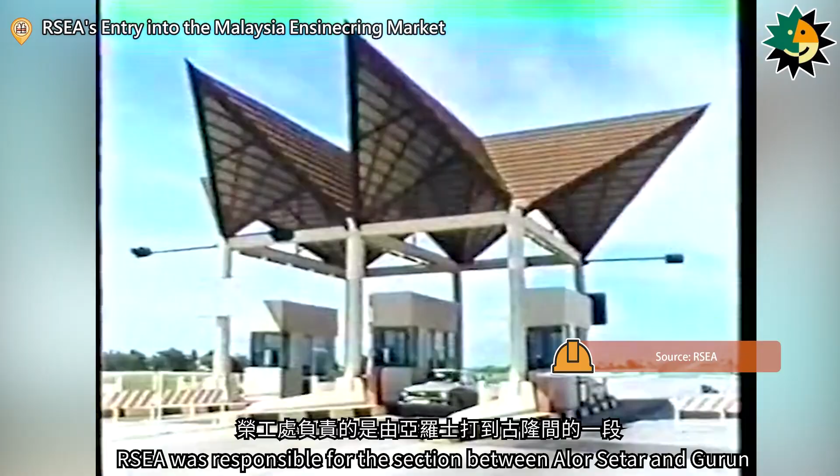The first project undertaken by Retired Servicemen Engineering Agency in Malaysia was the Gurun Expressway project, a north-south highway spanning a total length of 928 kilometers. Retired Servicemen Engineering Agency was responsible for the section between Alor Setar and Gurun. As the route had to traverse swampy terrain, construction proved to be extremely challenging.

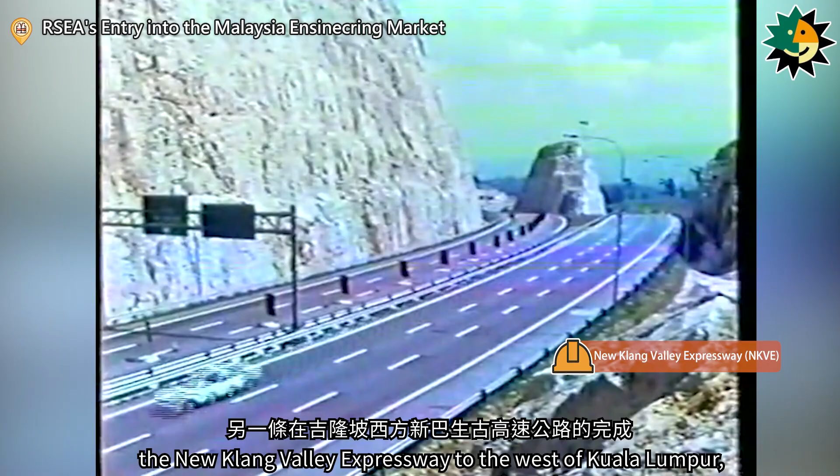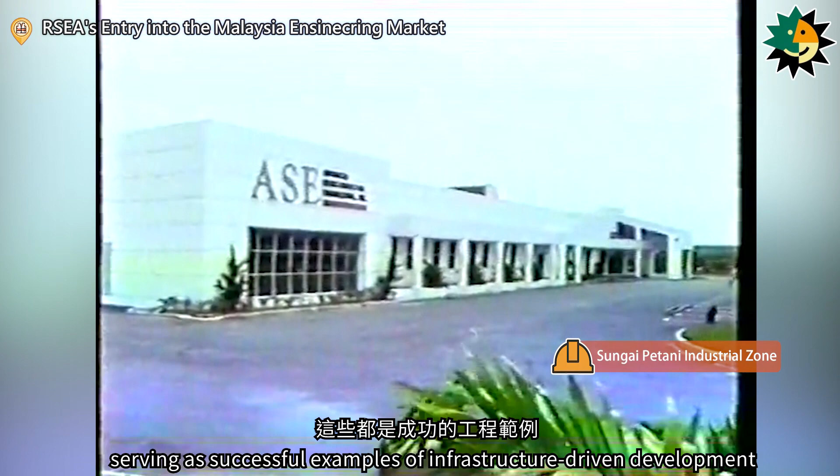The completion of another project, the new Klang Valley Expressway to the west of Kuala Lumpur, opened up a new economic backbone for the region, leading to the development of the free trade zone in Ipoh and the Sungai Petani Industrial Zone in Kedah. These zones attracted numerous domestic manufacturers to invest and establish factories, serving as successful examples of infrastructure-driven development.

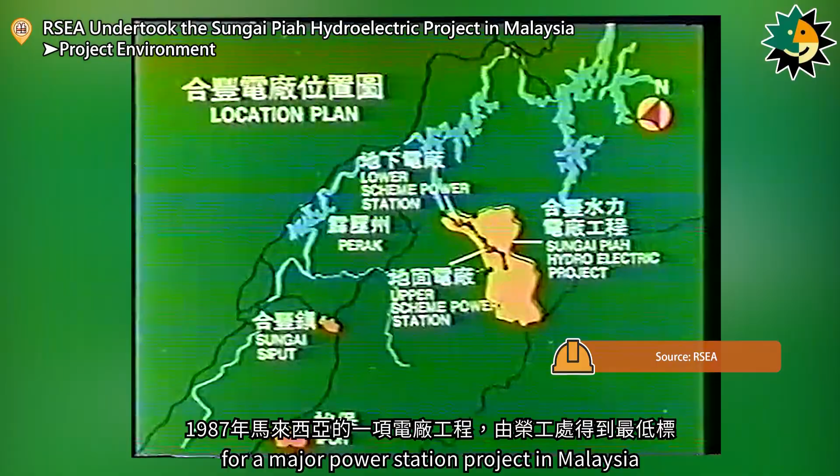In 1987, Retired Servicemen Engineering Agency won the lowest bid for a major power station project in Malaysia. The Sungai Piah hydroelectric project, located in the mountainous region approximately 60 kilometers northeast of Ipoh in Perak, Malaysia, was a massive and formidable undertaking. The project site was located in an undeveloped rainforest at an elevation of 800 meters.

To promote economic development in Perak State, the Malaysian government specifically chose the Piah River Basin for the construction of the power station. The planned catchment area covered 364 square kilometers. The entire project was primarily divided into two construction sections, the upstream and downstream segments. The upstream section included an upper power station, a low-pressure tunnel, steel liner tunnel, and access tunnels totaling 8,000 meters in length, along with 2 vertical shafts and 3 intake structures.

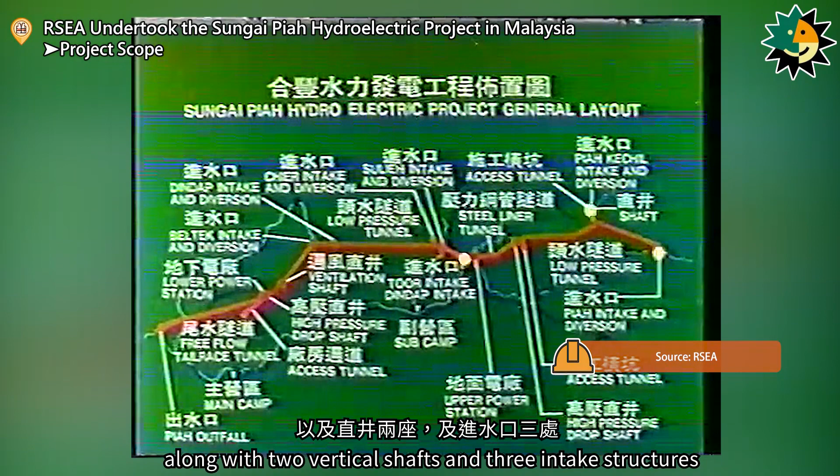The downstream section included a low-pressure tunnel, plant access tunnels, a lower power station, steel liner tunnels beneath the plant, and a free-flow tail-race tunnel, totaling 16,000 meters in length. It also featured 4 intake structures and 6 vertical shafts. Other construction work included more than 1.6 million cubic meters of surface excavation, over 300,000 cubic meters of backfilling, 66 kilometers of road improvement, 11 kilometers of new road construction, and 5 bridges.

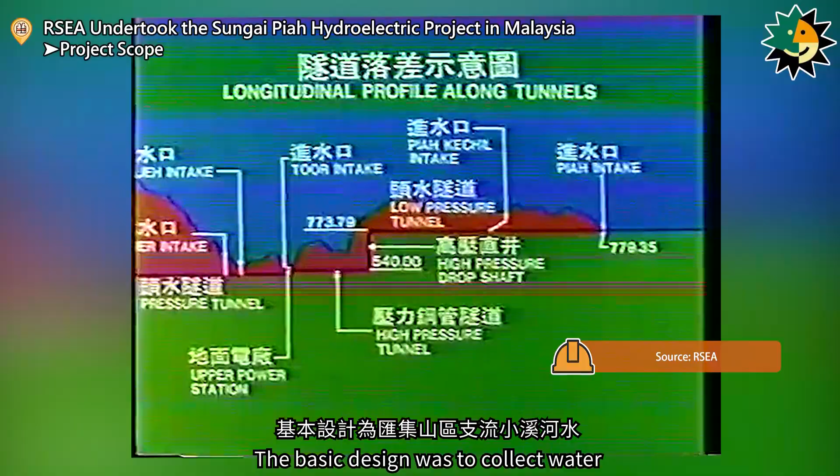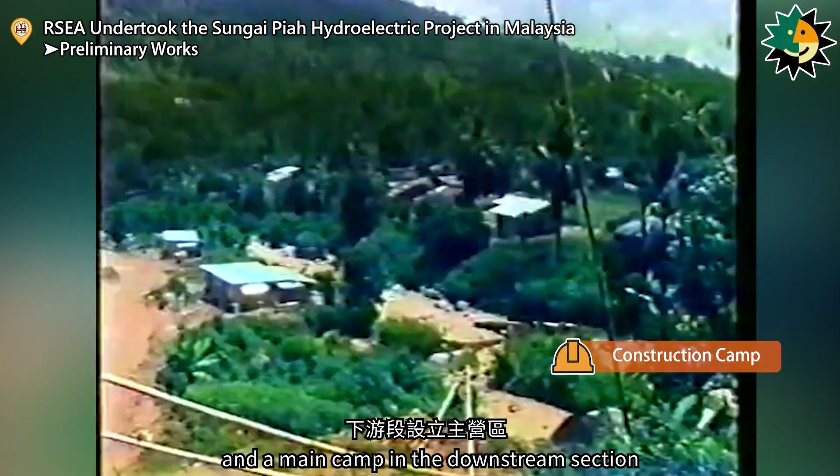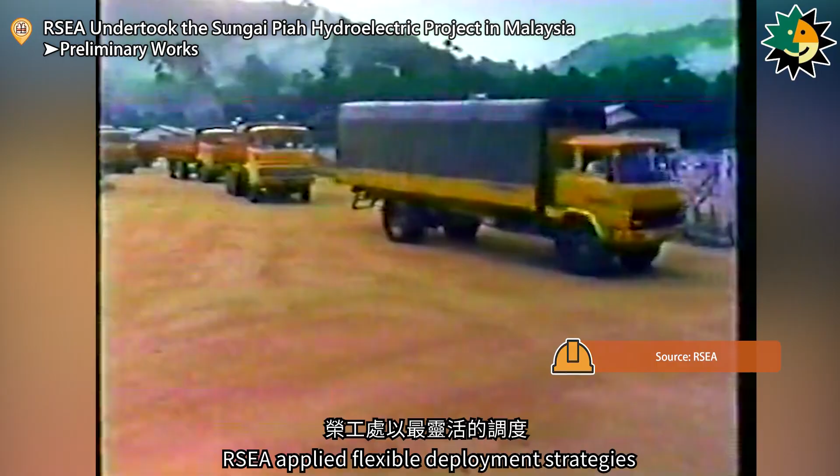The basic design was to collect water from mountain streams and tributaries, channeling it to the power station through diversion tunnels, and using the elevation drop and abundant inflow to generate electricity. The project officially began on April 10, 1987. In the early stage of construction, a secondary camp was established in the upstream section and a main camp in the downstream section. Construction equipment was sourced from Saudi Arabia, Gurun, and Taiwan. Retired Servicemen Engineering Agency applied flexible deployment strategies to make the most efficient use of these resources.

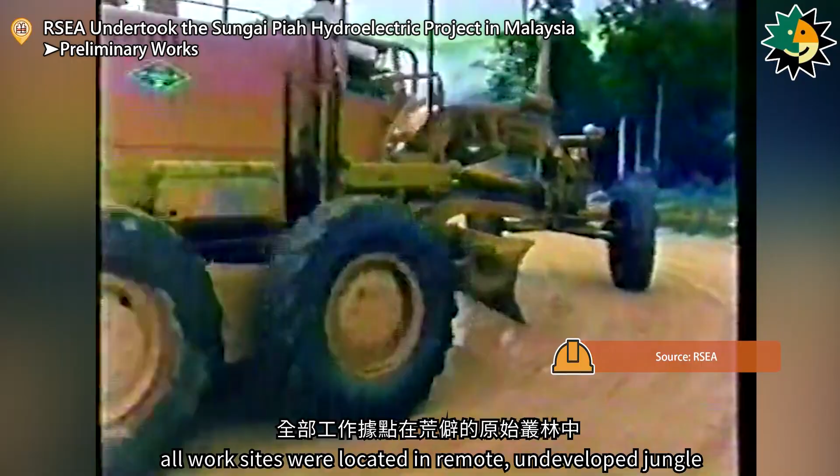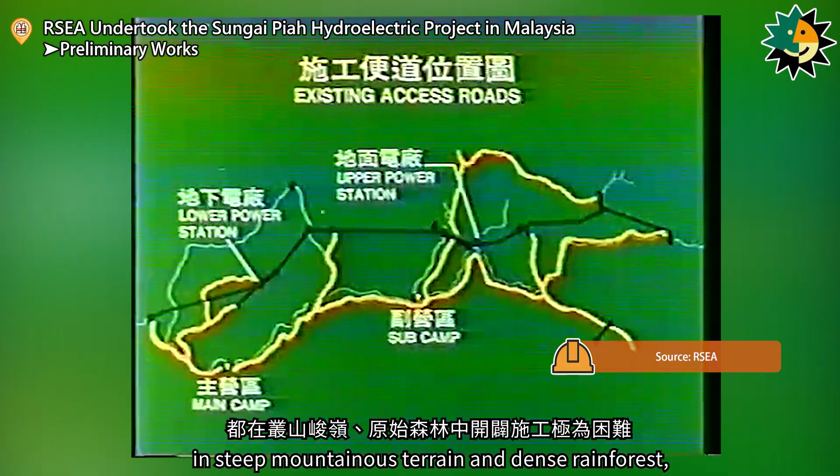As the project area spanned a radius of 95 kilometers, all work sites were located in remote, undeveloped jungle. Survey crews had to traverse mountains and ridges on a daily basis, and the work was extremely demanding. Construction roads served as the main arteries for the project, with a total road length of approximately 91 kilometers within the work area. All construction had to be carried out in steep mountainous terrain and dense rainforest, making the work extremely difficult. Among the total length, 35 kilometers were shared with logging trucks operated by forestry agencies, which not only carried heavy loads and caused significant damage, but also made road maintenance even more challenging.

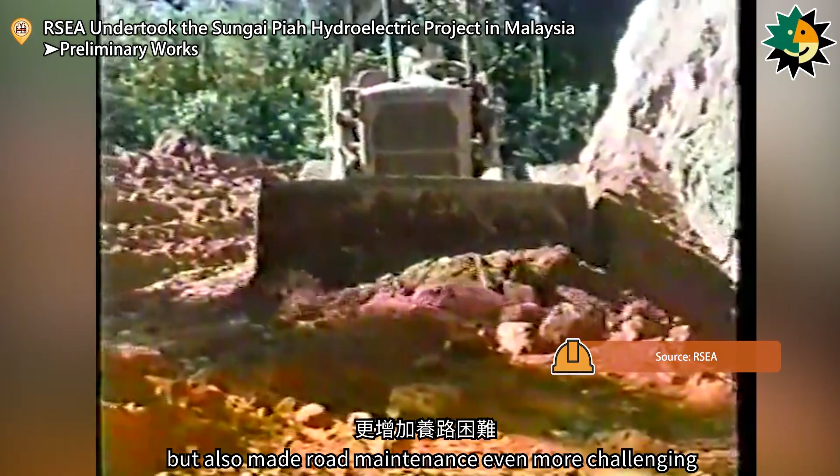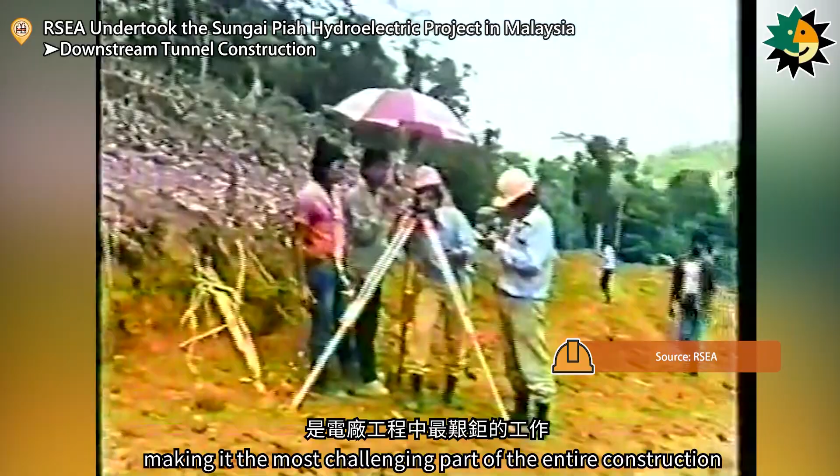Retired Servicemen Engineering Agency therefore established a dedicated road maintenance team to carry out repair and upkeep work, ensuring smooth transportation and supply access. The total length of tunnels in the Sungai Piah hydroelectric project reached 23 kilometers, making it the most challenging part of the entire construction. The upstream section was divided into 3 work phases, and the downstream section into 5 work phases, all of which were successively launched.

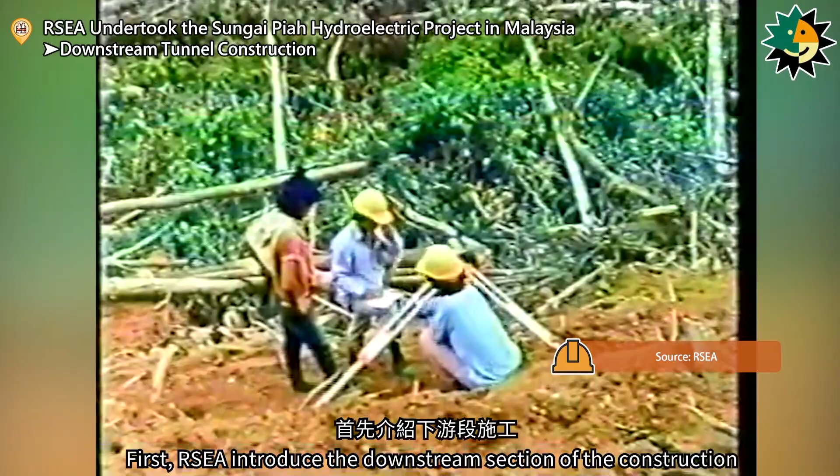First, Retired Servicemen Engineering Agency introduced the downstream section of the construction. 4 work phases were carried out simultaneously in the downstream section, including a 17-kilometer main tunnel, access tunnels, a free-flow tailrace tunnel, and 1 lower power station. The tunnels were constructed in 3 different diameters: 6.2 meters, 3.42 meters, and 3.72 meters.

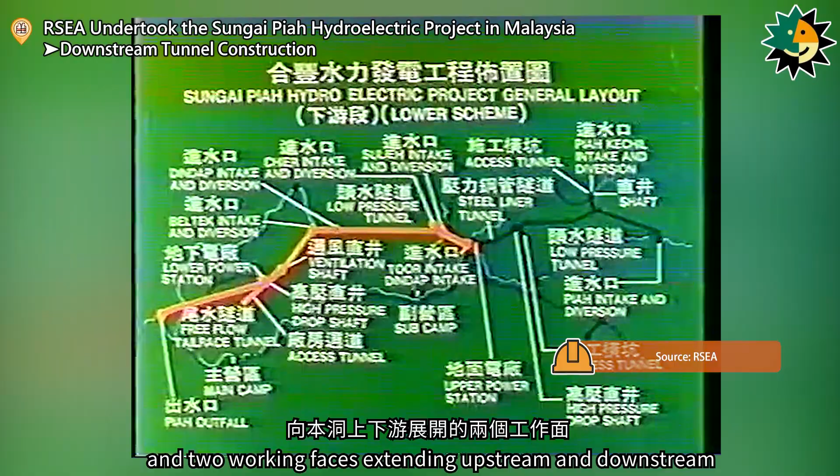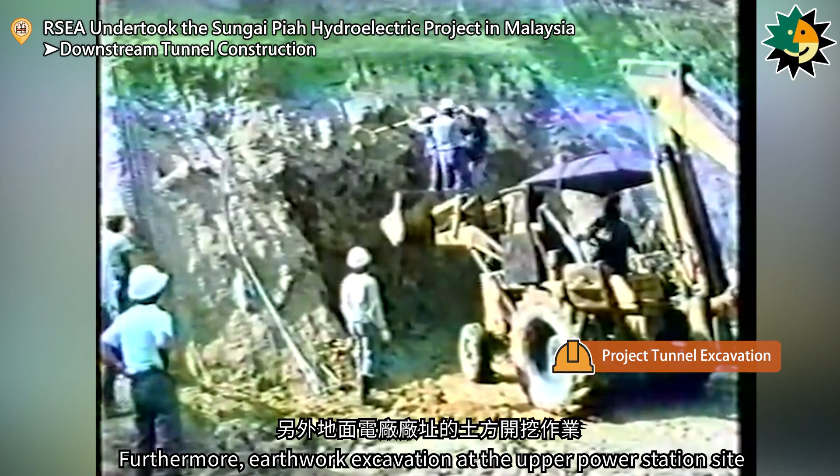At the initial stage of construction, work began at the Dindap adit and 2 working faces extending upstream and downstream toward Beltek adit, the access tunnel to the lower power station, the upstream vertical pressure shaft tunnel, and the Piah Kechil adit. Furthermore, earthwork excavation at the upper power station site was also progressing at full speed.

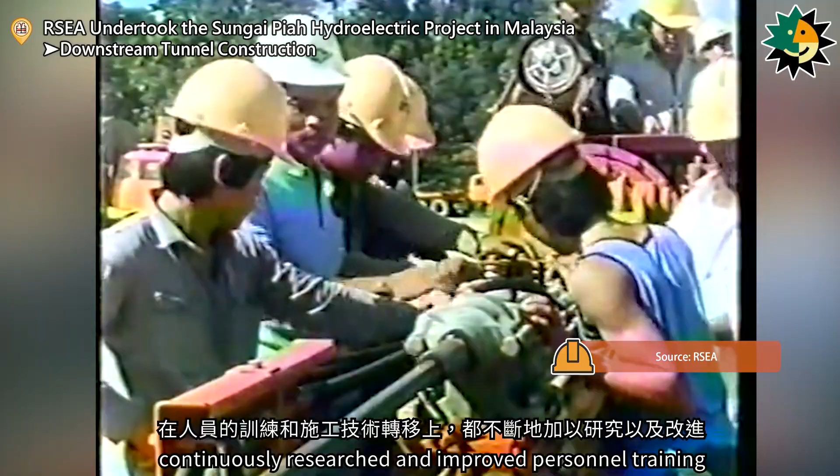In addition to on-site construction work, the Sungai Piah Construction Office continuously researched and improved personnel training and the transfer of construction techniques. This project adopted the new Austrian tunneling method for tunnel excavation. Construction personnel first conducted surveying and staking out, followed by drilling blast holes using a jumbo drill, then loading explosives and wiring them for detonation.

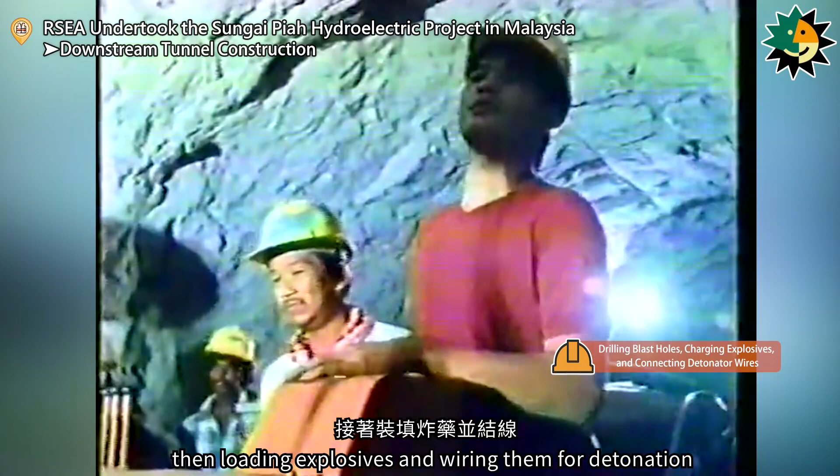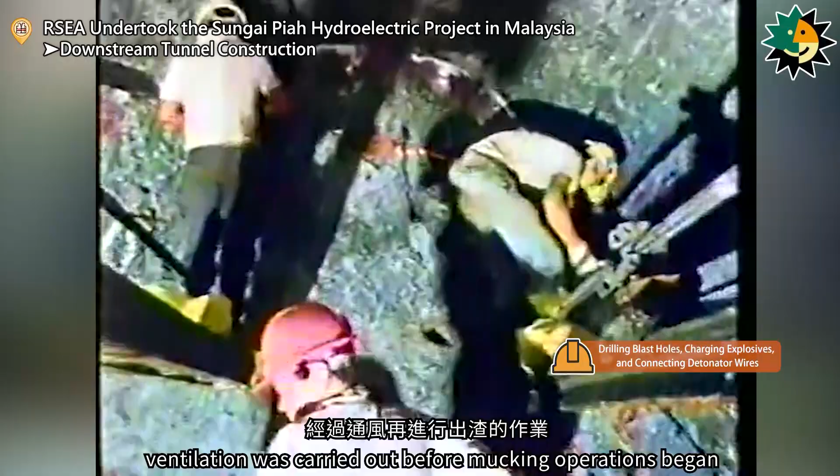To overcome the challenges of tunnel excavation, the construction team carefully developed various blasting techniques to adapt to different rock formations, avoid over-excavation, and reduce construction costs. After blasting, ventilation was carried out before mucking operations began.

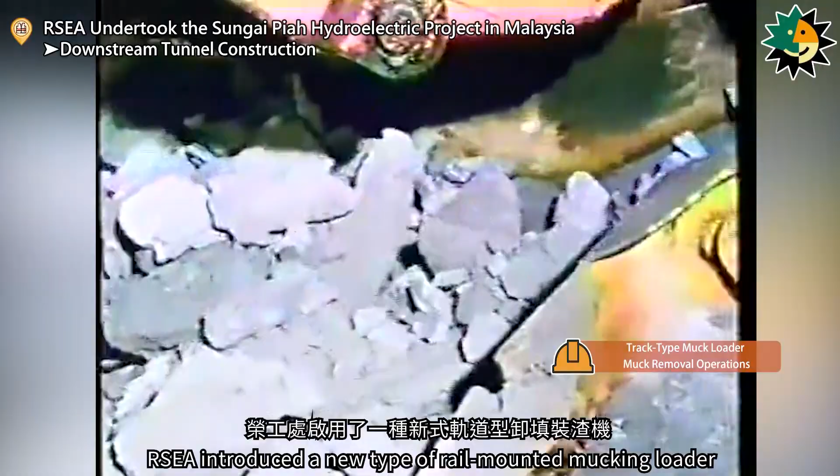In the early stages of tunnel entry, due to the narrow and extended cross-section of the tunnel, Retired Servicemen Engineering Agency had to rely on small auxiliary equipment to remove the muck in order to maintain construction progress. However, both excavation and mucking operations were difficult and affected the project schedule. To address this issue, Retired Servicemen Engineering Agency introduced a new type of rail-mounted mucking loader.

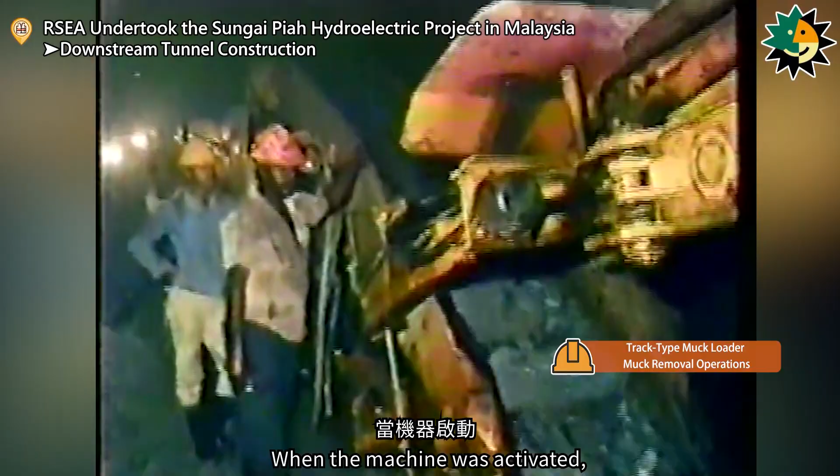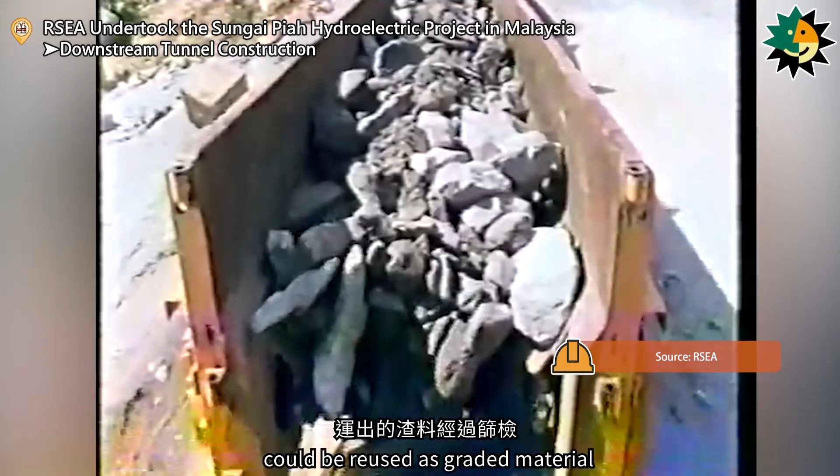At the front of the machine were 2 crab claw-like scooping arms, followed by a conveyor belt. When the machine was activated, the scooping arms alternated continuously, pushing soil and rock onto the conveyor system. The conveyor belt then quickly transported the muck backward, unloading it into the muck car stationed behind the machine. The machine had a mucking capacity of 30 cubic meters per hour. After screening, the excavated material could be reused as graded material for constructing temporary access roads.

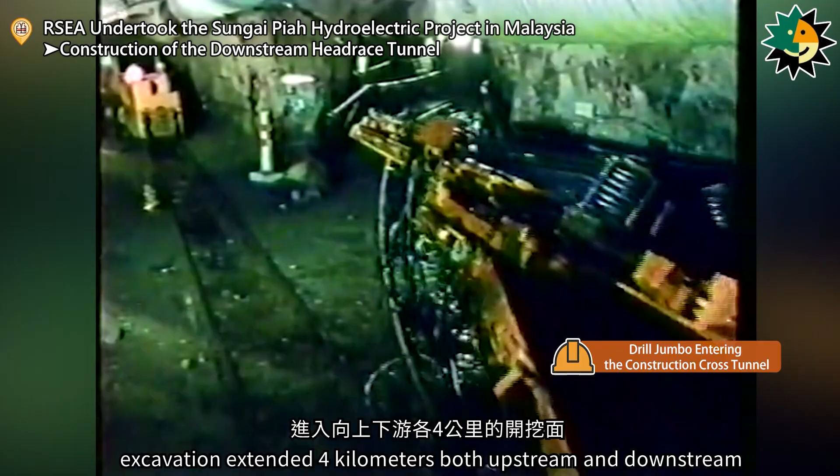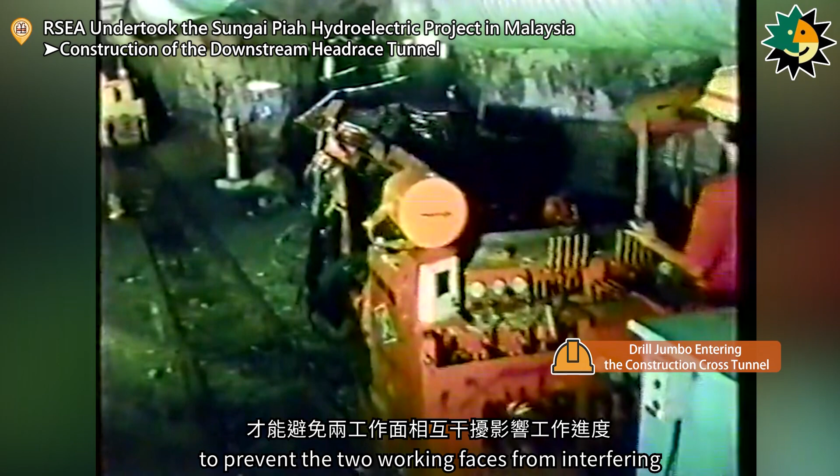In the downstream headrace tunnel, from a 200-meter adit, excavation extended 4 kilometers both upstream and downstream. Since there was only one access point, Retired Servicemen Engineering Agency had to carry out meticulous planning and calculations to prevent the 2 working faces from interfering with each other and affecting construction progress. Owing to the use of the smooth blasting method, the tunnel face exhibited a neat and visually appealing result.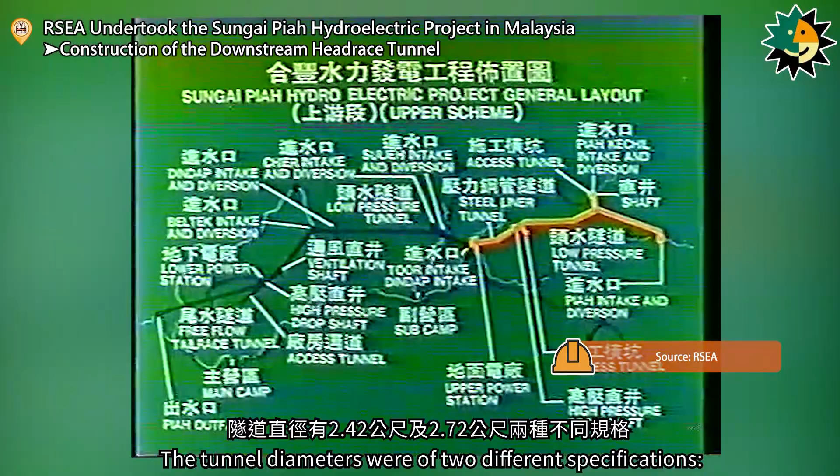The rock quality in the downstream headrace tunnel was excellent, allowing for the immediate commencement of the invert concrete work after surface cleaning. Meanwhile, 4 working faces in the upstream section were deployed simultaneously. These included the 8-kilometer-long main tunnel, access tunnels, vertical shafts, and 1 open-air powerhouse. The tunnel diameters were of 2 different specifications, 2.42 meters and 2.72 meters.

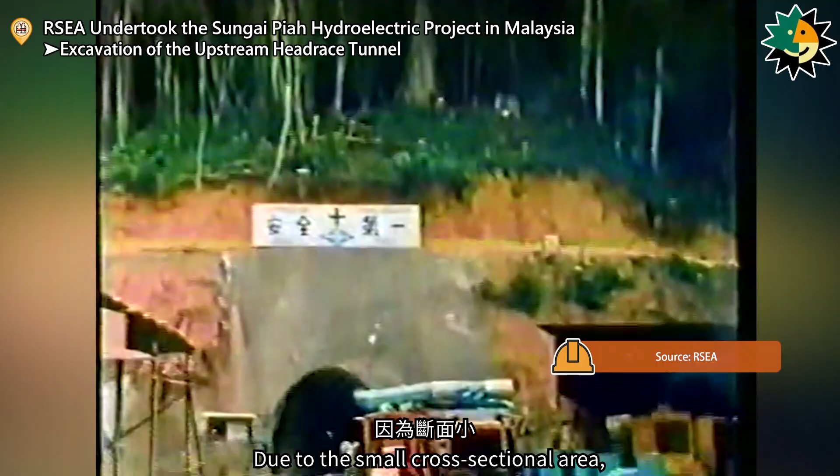The upstream low-pressure tunnel passed through a fault zone with extremely weak rock. Due to the small cross-sectional area, excavation machinery could not be used, therefore, manual ring-cut excavation was adopted. Before the track was fully laid, construction workers relied on small auxiliary equipment to remove excavated material in order to maintain the construction schedule.

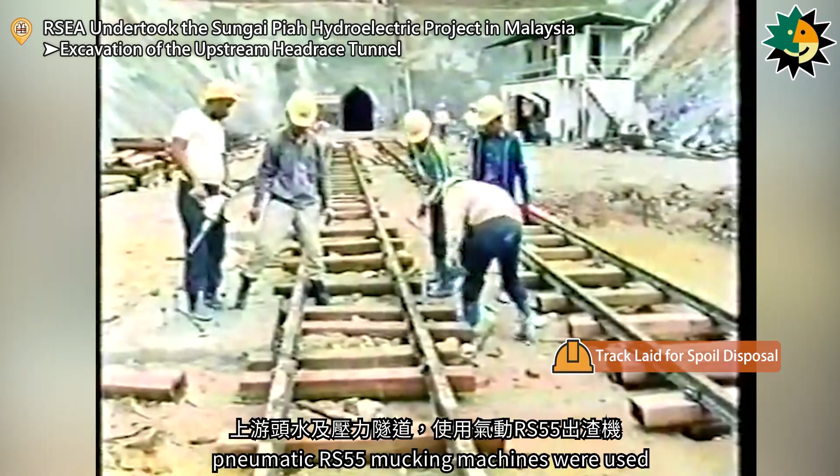When the track was fully laid, pneumatic RS-55 mucking machines were used in the upstream low-pressure and steel liner tunnels, in combination with small 2 cubic meter muck cars for debris removal, achieving a mucking capacity of 6 cubic meters per hour. Powered by compressed air, the RS-55 mucking machine offers several advantages, including zero air pollution, compact size, and ease of operation.

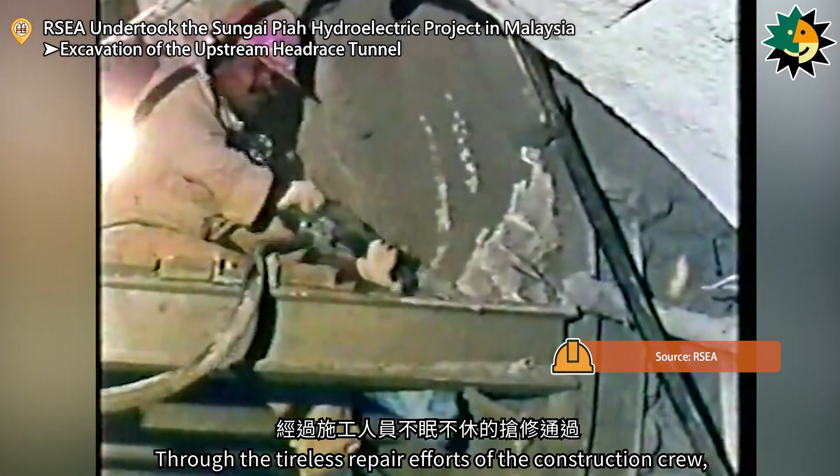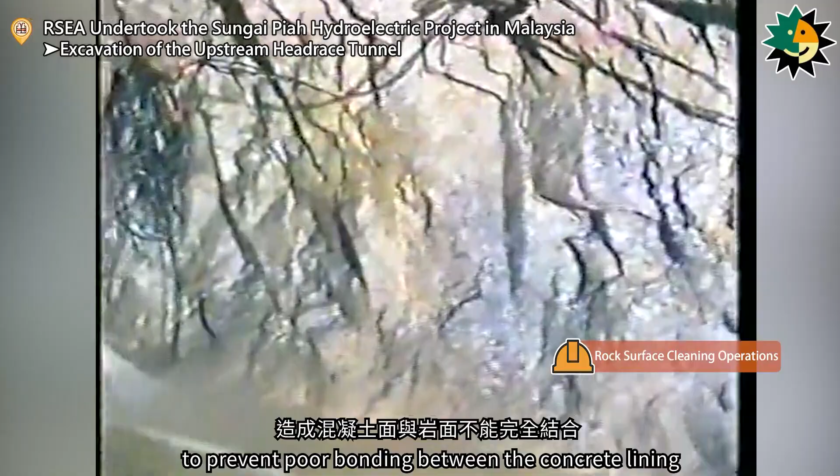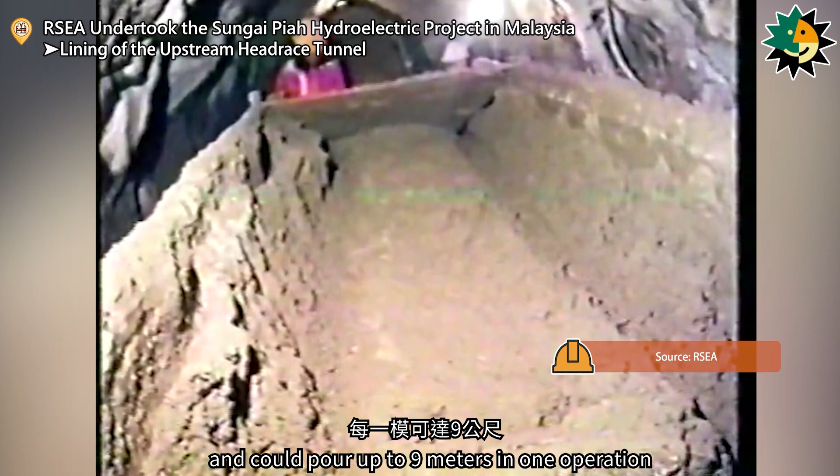Retired Servicemen Engineering Agency used a movable steel formwork system to cast the concrete lining. Each steel formwork was 11.8 meters long and could pour up to 9 meters in one operation. The entire Piah Kechil pressure tunnel was constructed using 3 different lining types: reinforced concrete, plain concrete, and concrete-filled steel tubes. 8 hours after casting, the movable steel formwork could be removed from the tunnel. Through such repeated operations, the tunnel lining was gradually completed.

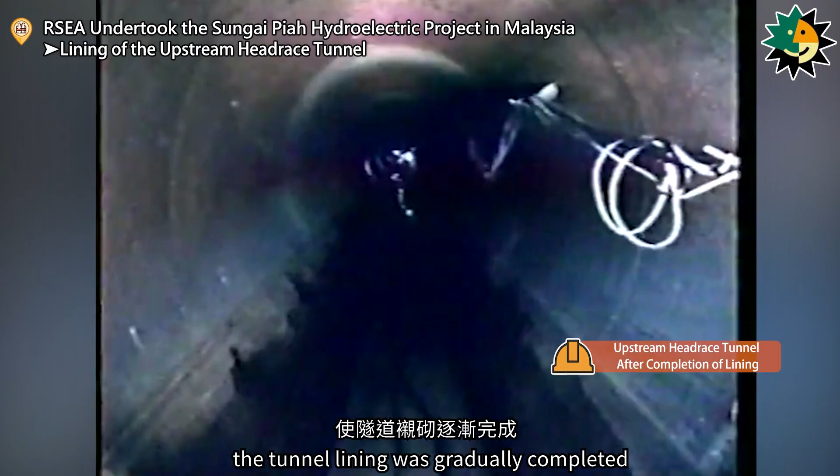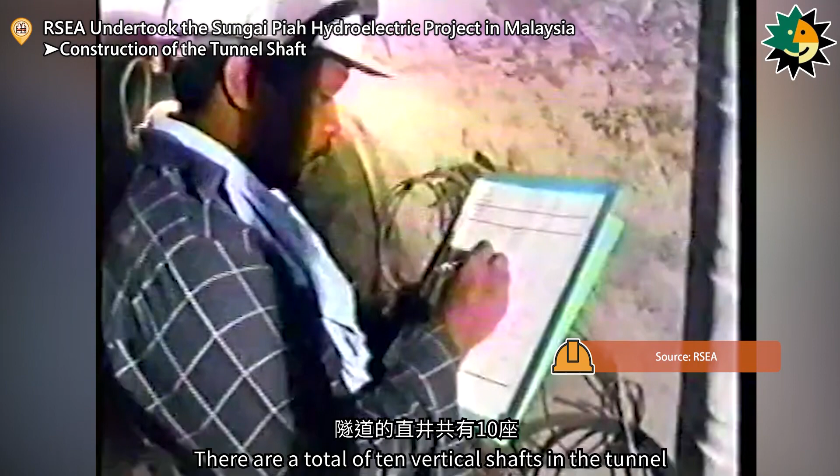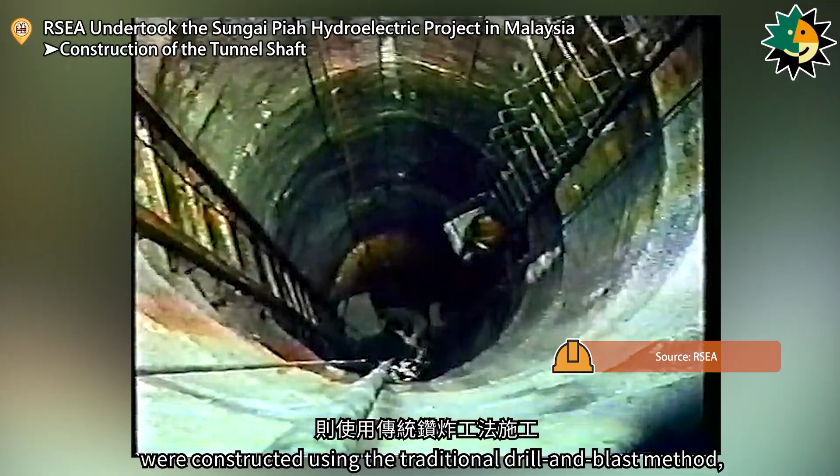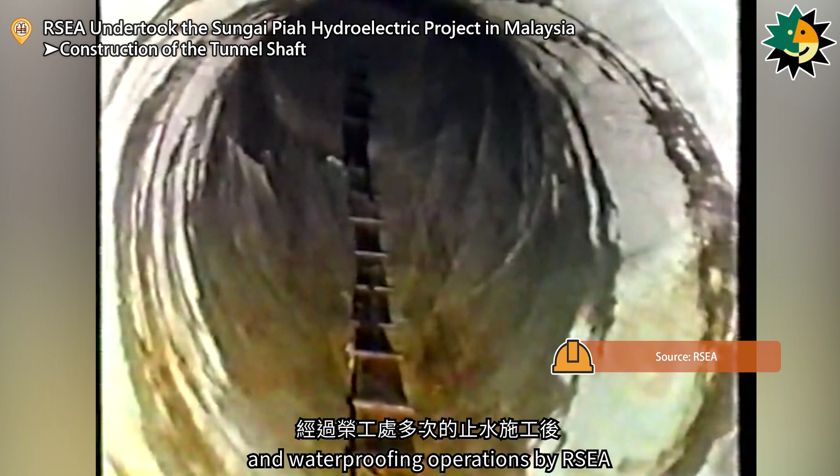Due to the abundant groundwater in the upstream pressure shaft, it was only after multiple grouting and waterproofing operations by Retired Servicemen Engineering Agency that the severe seepage issue was finally overcome. There are a total of 9 check dams, distributed throughout the entire route, and all are miniature-scale small dams.

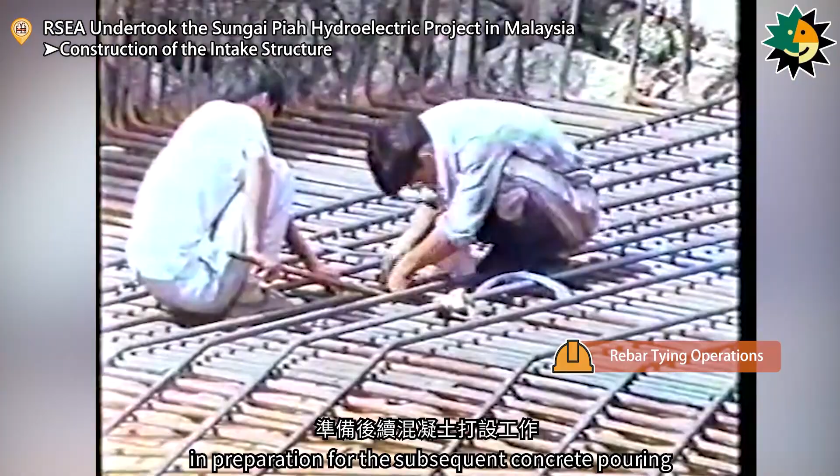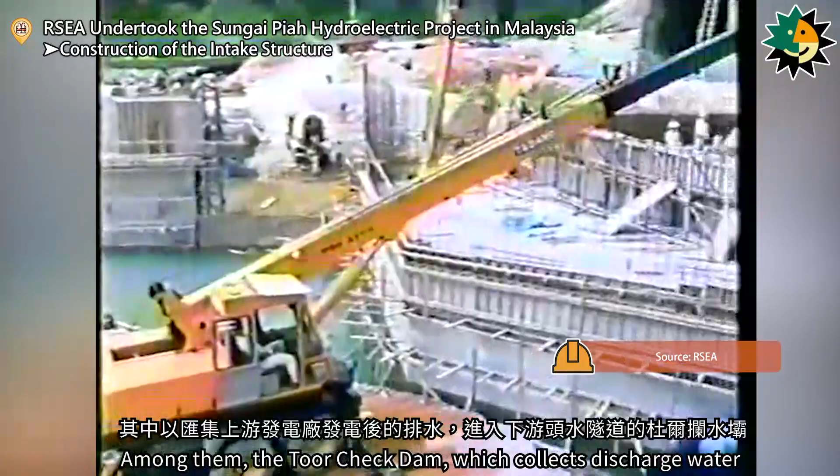The intake structure at the site is under full-scale construction, with workers tying rebar in preparation for the subsequent concrete pouring. Due to terrain constraints, the concrete placement is extremely difficult. In addition to using concrete pumps, a bucket hoisting method is also employed. Among them, the Toor Check Dam, which collects discharge water from the upstream power station and channels it into the downstream headrace tunnel, is the largest of the check dams.

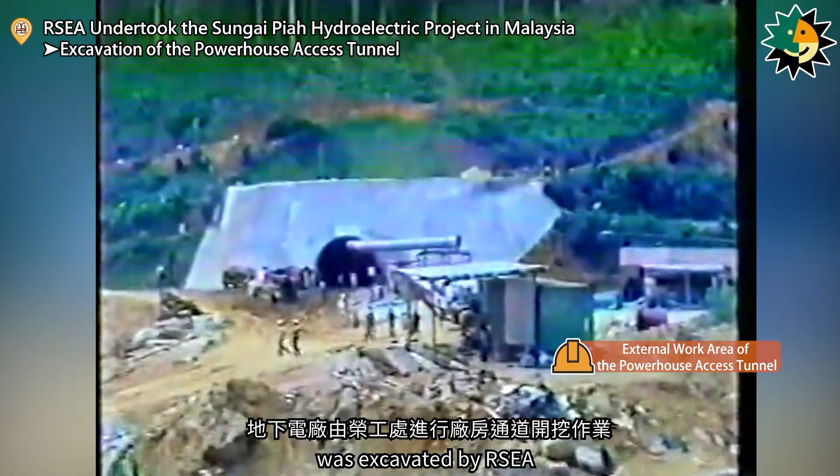The Sungai Piah hydroelectric project includes 2 power stations in total, one of which, an underground power station, belongs to the downstream construction section. The underground power station's access tunnel was excavated by Retired Servicemen Engineering Agency. Due to excessively loose geological conditions in certain sections of the tunnel, inverted arch concrete was immediately poured after excavation to maintain the stability of the tunnel.

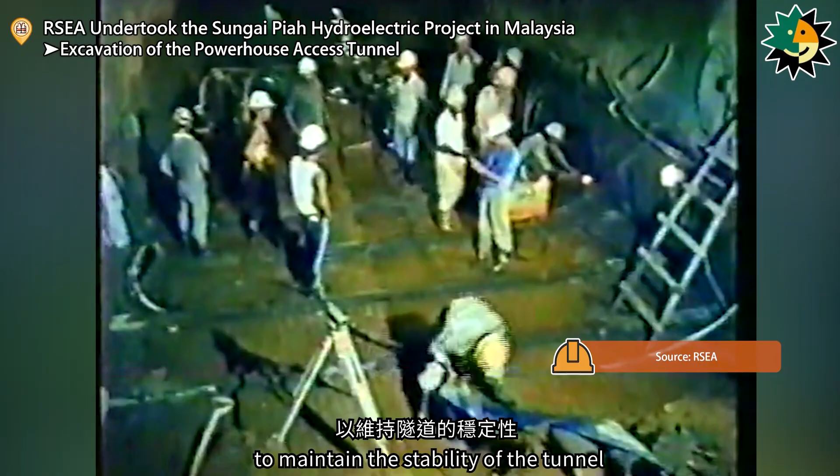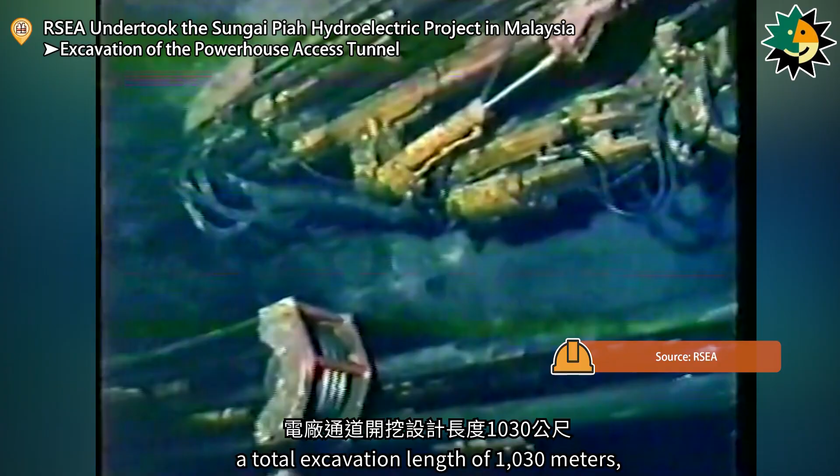Retired Servicemen Engineering Agency used a dual-boom, rubber-tired, electric jumbo drill to bore blast holes. The power station access tunnel was designed with a total excavation length of 1,030 meters, with a downward gradient of 12%, and was constructed using the New Austrian Tunneling Method. However, during tunnel excavation, a large amount of groundwater was encountered, gushing out from the tunnel face as if a dam had burst.

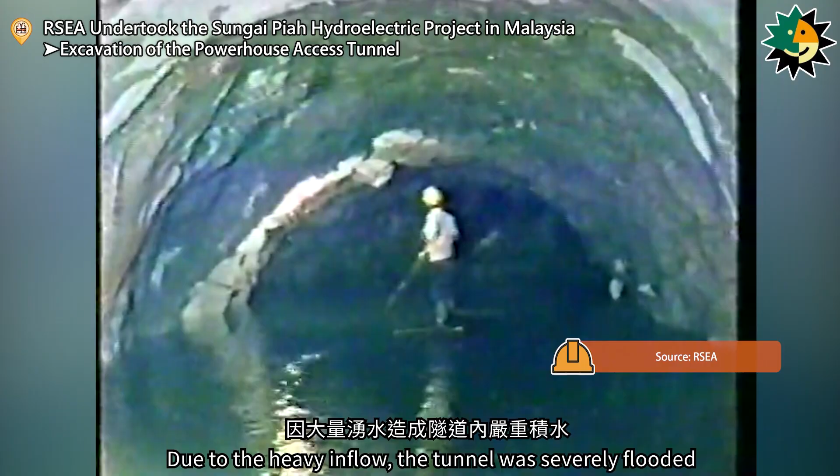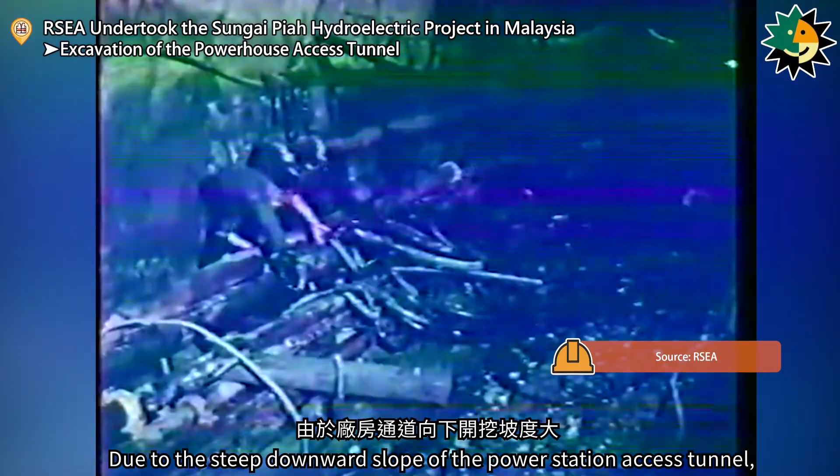Due to the heavy inflow, the tunnel was severely flooded. Under extremely difficult circumstances, several high-head large-capacity pumps were urgently deployed. Due to the steep downward slope of the power station access tunnel, pumping out water was extremely difficult. After careful planning by the construction team and continuous day and night pumping, the heavy groundwater inflow was eventually overcome, and the excavation of the power station access tunnel was completed.

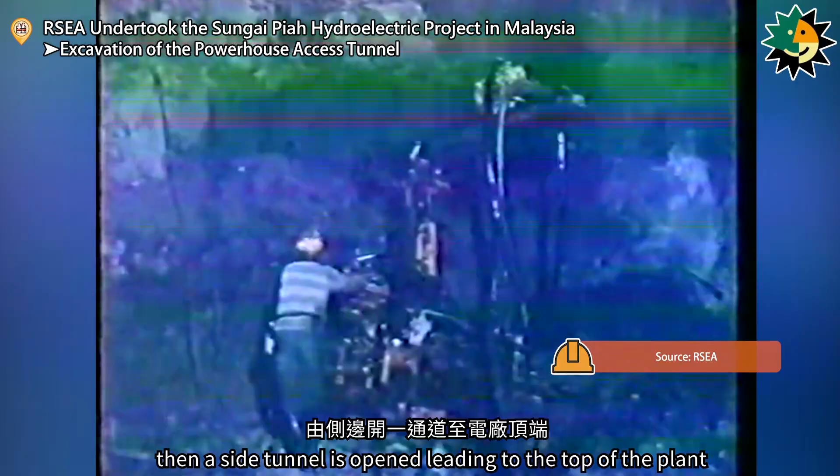The power station access tunnel enters the lower power station, then a side tunnel is opened leading to the top of the plant. From the top, the roof pilot heading above the power station is expanded, and excavation of the lower power station begins using a top-down bench blasting method. Muck removal was carried out using loaders and trenchers, in coordination with dump trucks.

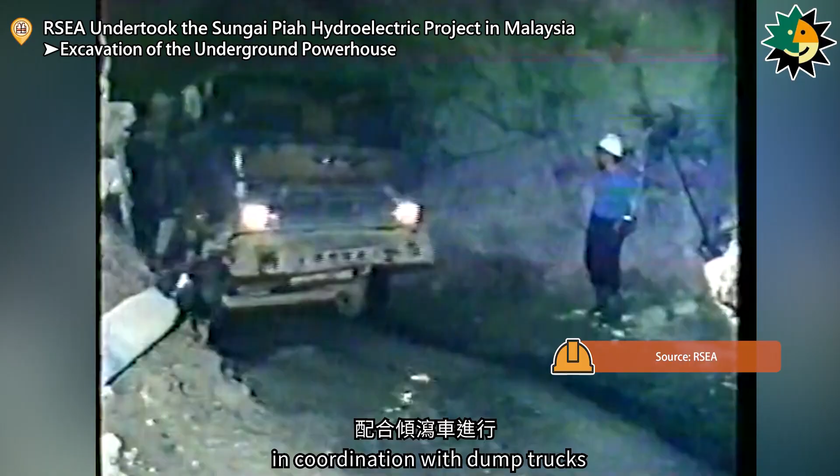After entering the lower power station, a natural underground stalactite cave was discovered on the side of the plant. As it concerned the safety of the power station and the tail race, Retired Servicemen Engineering Agency carried out rock surface protection and implemented necessary protective measures within the natural cave. The lower power station is located within the mountain, designed as a plant measuring 64 meters in length, 16 meters in width, and 25 meters in height, housing 2 generators.

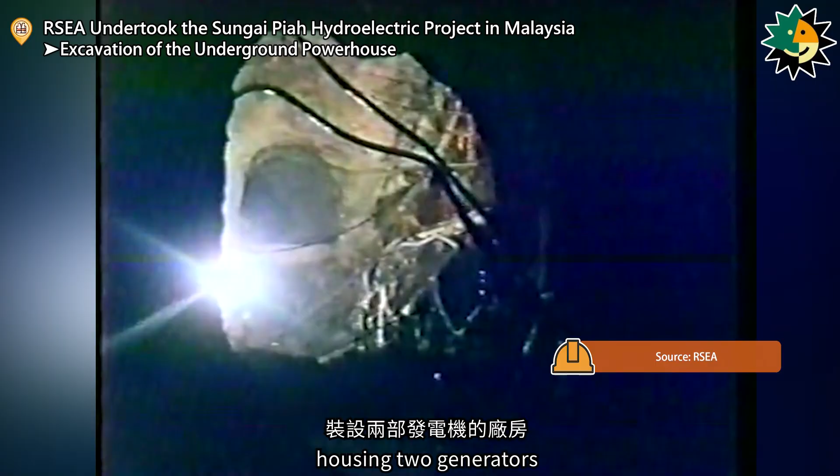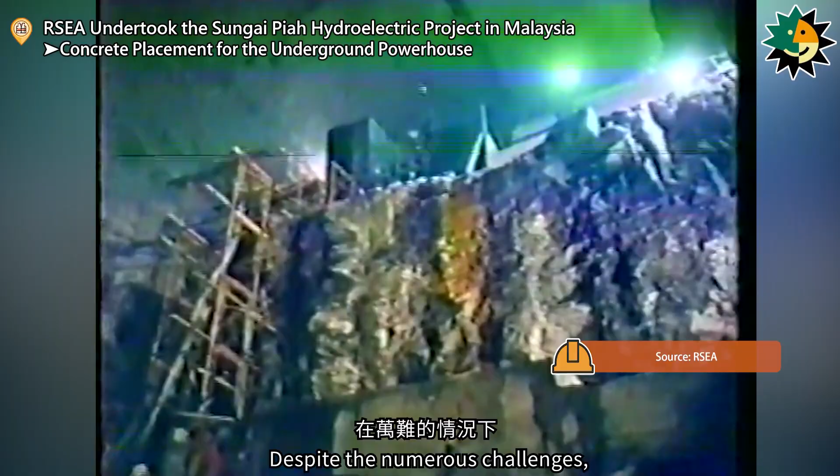After the lower power station excavation was completed, concrete casting operations commenced. Due to spatial and topographical constraints, Retired Servicemen Engineering Agency adopted various methods: concrete pump truck casting, electric pump casting, and chute casting. Despite the numerous challenges, the concrete casting work was eventually completed.

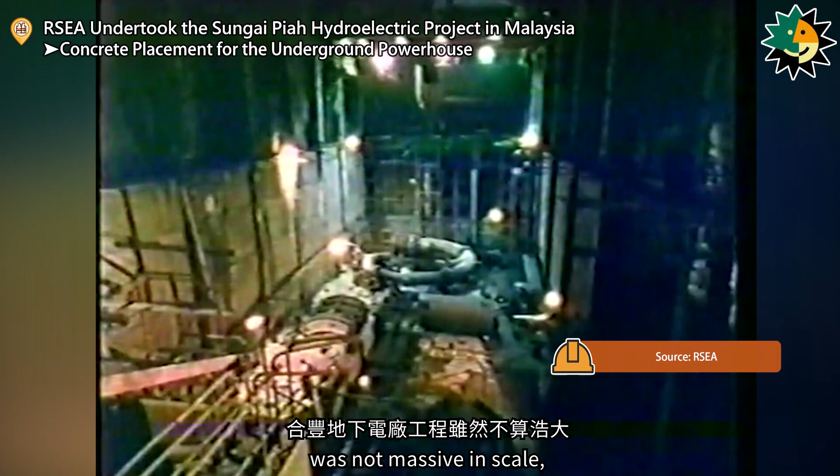While the concrete was being cast in the underground power station, it was necessary to coordinate with foreign contractors for the installation of the generator units, and Retired Servicemen Engineering Agency was responsible for installing the pressure pipelines. Although the Sungai Piah underground power station project was not massive in scale, it was extremely challenging, and the construction team overcame numerous hardships to complete it.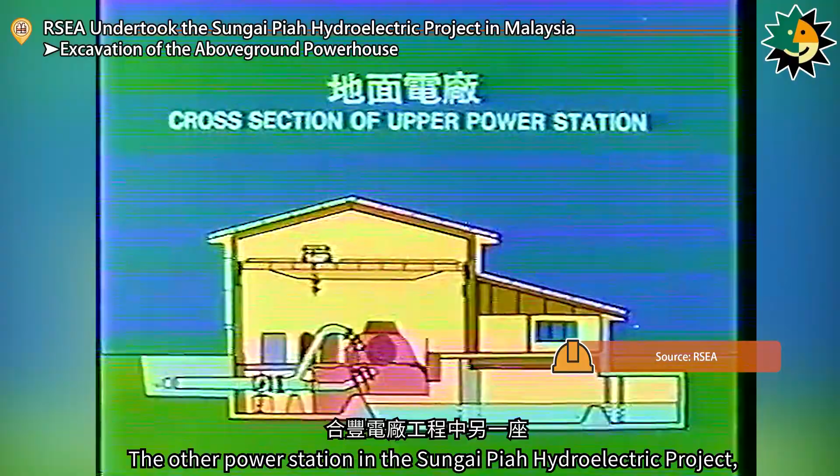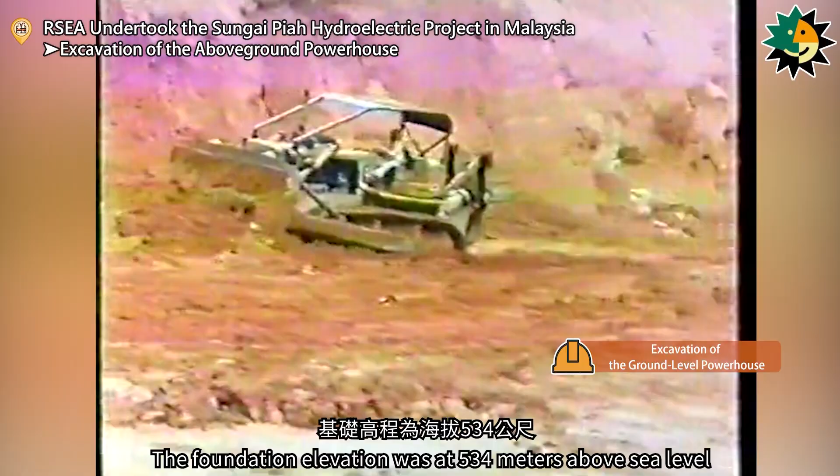The other power station in the Sungai Piah hydroelectric project, located at the upstream section, was an upper power station. This upstream upper power station was constructed using a high-slope excavation method. While excavation was carried out, vegetation was planted simultaneously to protect the stability of the slopes. The total excavation area of the plant measured 40 meters in length and 40 meters in width, with an average excavation depth of 5.3 meters and a total earthwork volume of 8,000 cubic meters. The foundation elevation was at 534 meters above sea level.

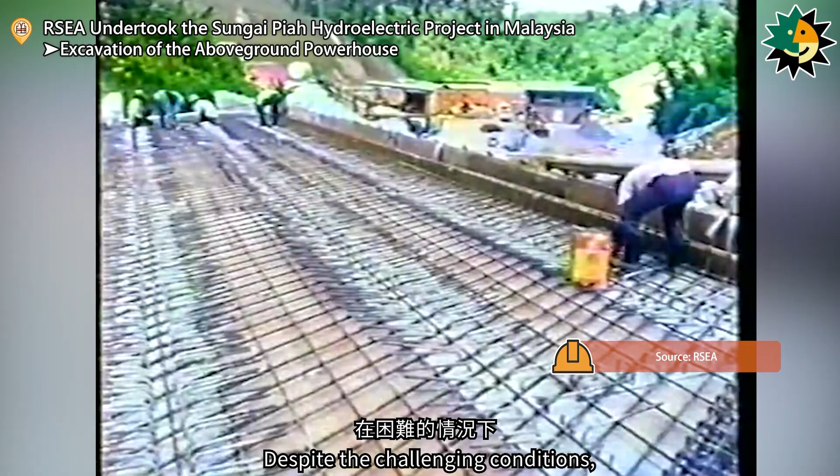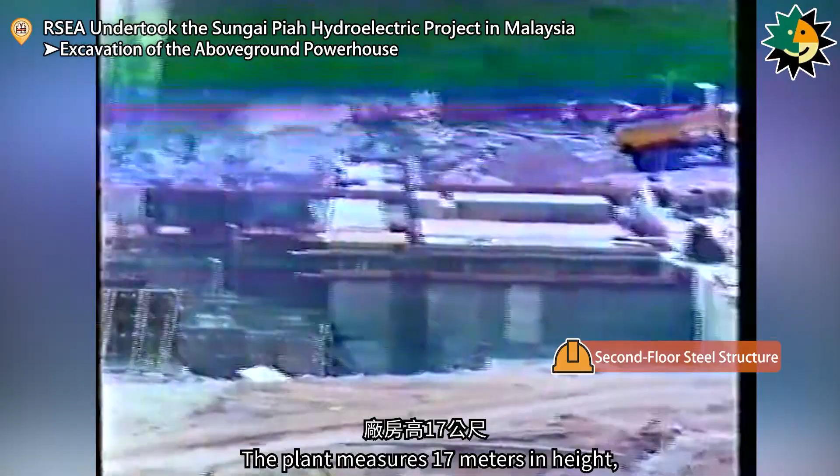After completing the site leveling, RSEA proceeded with the excavation work, while simultaneously constructing the drainage facilities for the power station. Despite the challenging conditions, a concrete bridge was built to provide access to the upper power station. The upper power station on the upstream section of the Sungai Piah power station is an open-air facility. The first floor is constructed with reinforced concrete, while the second floor adopts a steel structure. The plant measures 17 meters in height, 27 meters in width, and 36 meters in length.

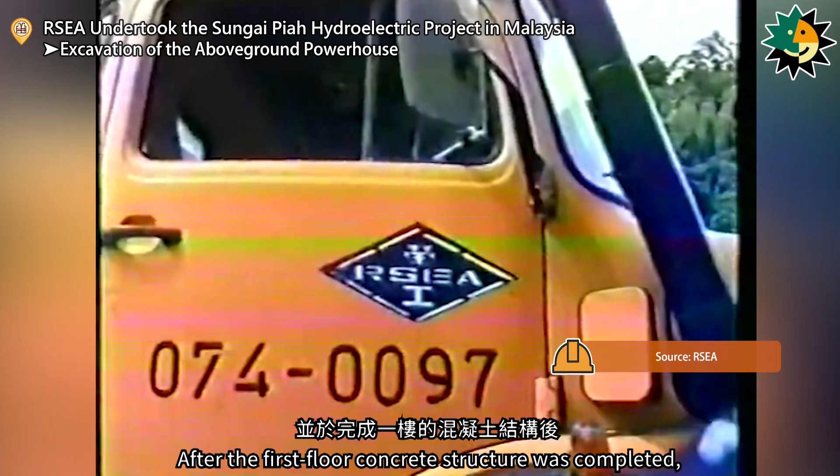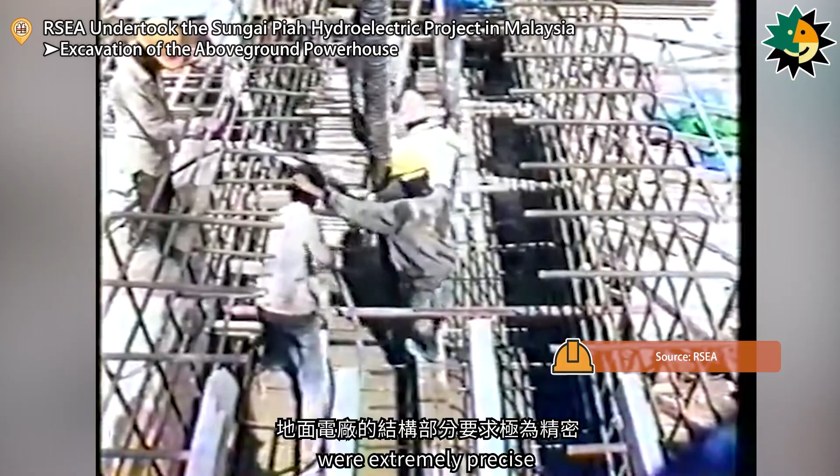RSEA carried out the foundation concrete pouring work. Upon completion of the foundation, the main structural concrete for the power station was cast. After the first floor concrete structure was completed, the installation of the turbine crane was handed over to the client. The structural requirements for the upper power station were extremely precise. During the concrete placement, RSEA had to coordinate with the foreign contractor responsible for the generator units to embed components and carry out the civil works accordingly.

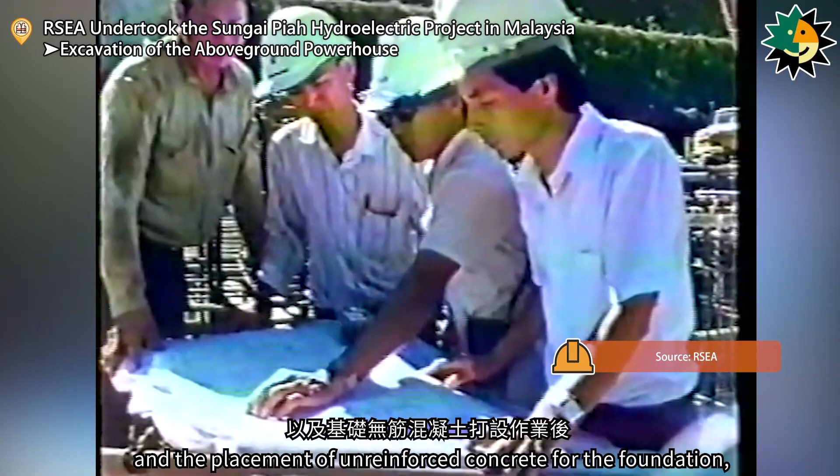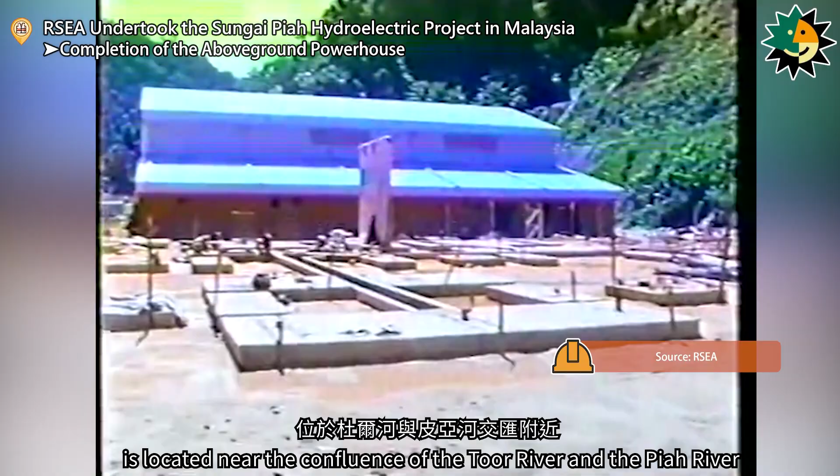The construction of the upper power station, after completing the tail race drainage structure, the foundation excavation, and the placement of unreinforced concrete for the foundation, then proceeded to the structural concrete placement phase for the turbine hall, cable conduits, and other related structures. This upper power station is located near the confluence of the Toor River and the Piah River. Its foundation concrete is 2 meters thick and is designed to accommodate 2 generators.

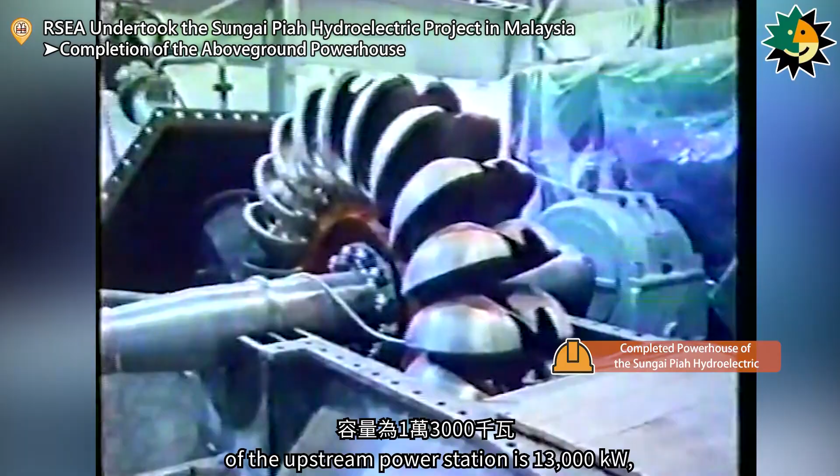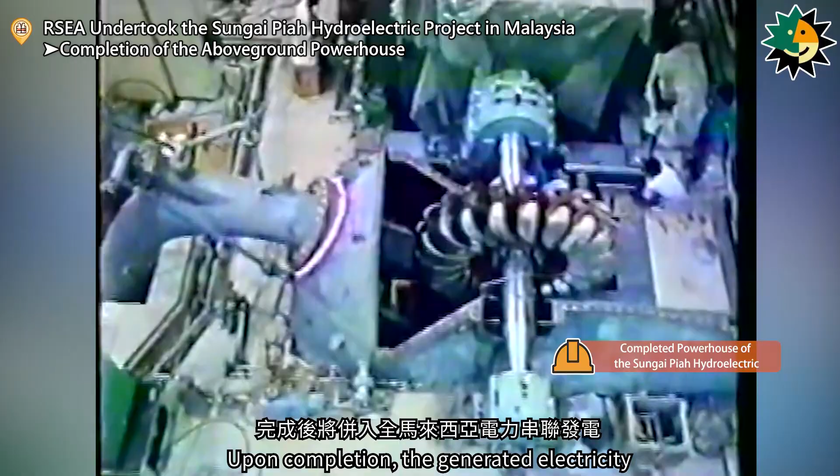The upstream upper power station and the downstream lower power station of the Sungai Piah hydroelectric project are approximately 10 kilometers apart. The designed power generation capacity of the upstream power station is 13,000 kilowatts, while that of the downstream power station is 51,000 kilowatts, bringing the total installed capacity to 64,000 kilowatts. Upon completion, the generated electricity will be integrated into Malaysia's national grid, supplying the entire power demand of the Ipoh area in Perak State, thus making a significant contribution to the economic development of the Malaysian people.

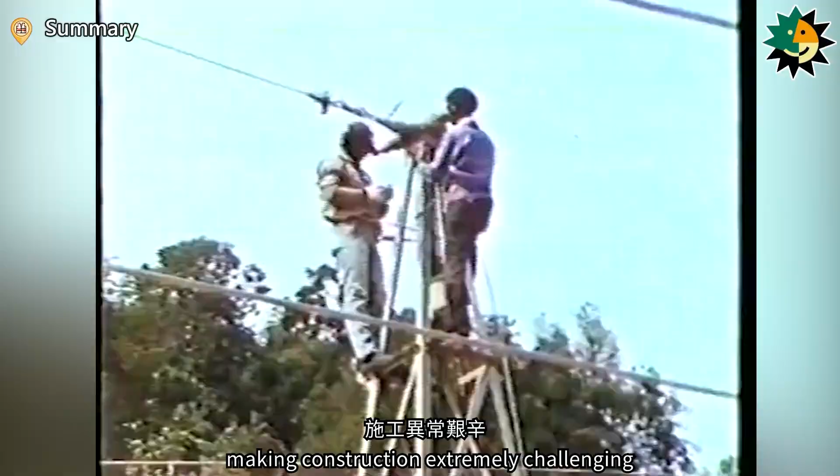This hydroelectric project was located in a remote area, making construction extremely challenging. In addition to facing tropical monsoon seasons, workers also had to contend with threats from tigers, elephants, and wild bees. These Retired Servicemen Engineering Agency's staff working at overseas construction sites have endured hardship and fought with perseverance. Many of the hardships and joys in their work and daily life were transformed into a strong fighting spirit and loyal cohesion through their faithful embodiment of Retired Servicemen Engineering Agency's 4 core management principles. Through their relentless efforts and strategic growth, Retired Servicemen Engineering Agency has expanded and established itself as a key player in Malaysia's engineering market.